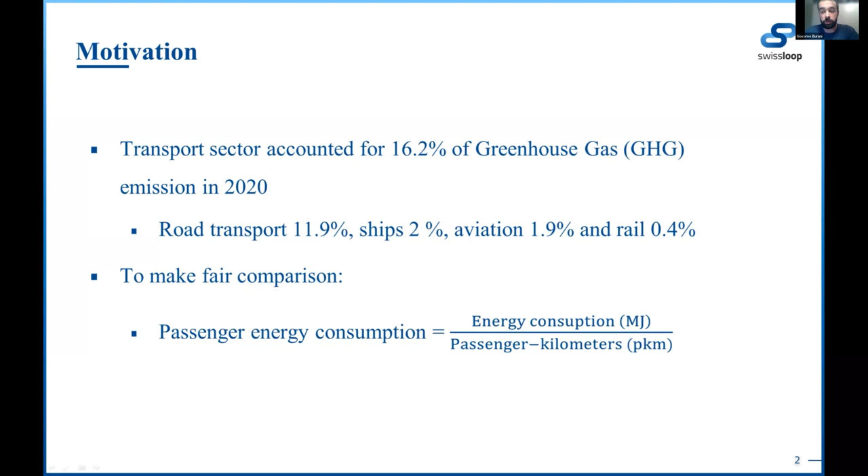In this table, this quantity, together with other parameters, is presented for various methods of transport. As you can see, train and buses have the lowest energy consumption at full capacity in the third column. But when this quantity is adjusted with the statistical occupancy, buses seem to be more energy efficient. However, they still present some problems such as speed limitation, low capacity, and traffic problems.

Another transport method visible on the table is the Hyperloop concept, which can be a valid alternative to this classic method of transportation, and even better.

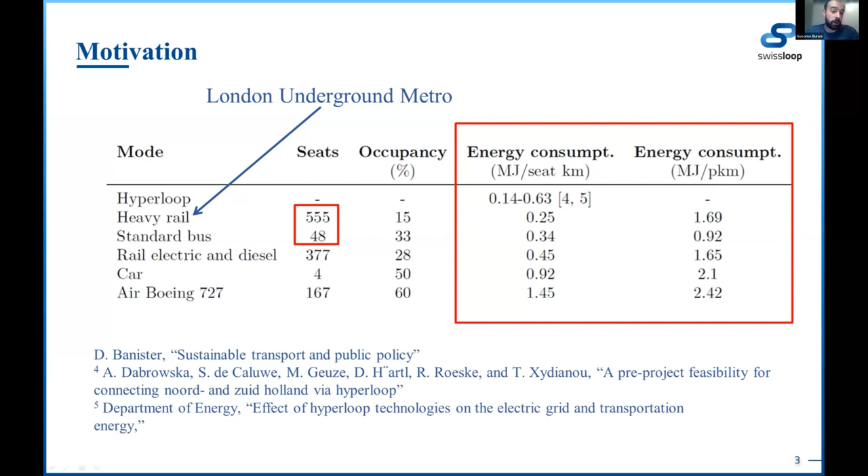This technology consists of magnetically levitated capsules traveling in vacuum tubes. It can reach a theoretical top speed of 1000 km per hour, comparable to that of planes and trains. It has a theoretical energy consumption comparable to that of trains and buses, as seen in the last table, and it is designed to not interfere with other capsules, solving the traffic problems. It's also quieter than both planes and trains, as the tubes can be placed underground or be soundproof.

It seems like this technology is combining the speed of planes and the energy efficiency of trains, and also bringing some additional advantages.

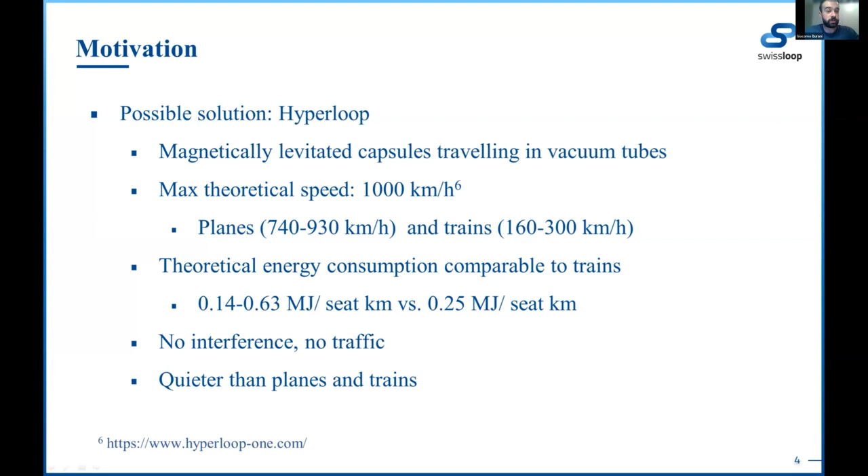Since this concept gained traction, a lot of university teams and companies were founded to develop this technology. One of them is the Swissloop team, founded at ETH in 2017, which I joined last season. This team builds a scaled-down prototype following the Hyperloop concept, the so-called pod. It innovates and improves it every year and tests it on a rail track.

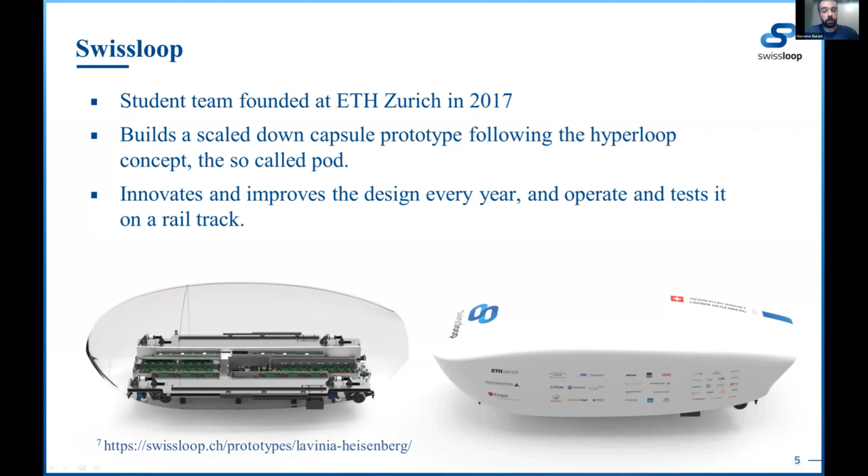Until last year, the pod consisted of a cart with wheels traveling on rail. One of the goals for last season was to remove the wheels, which are a source of friction and speed limitation, and provide a new guidance system to keep the pod centered on the track, because the new propulsion motor concept doesn't allow for passive stabilization anymore. My contribution to the team has therefore been to develop and simulate an actively controlled vertical levitation system and a magnetic guidance to solve these problems.

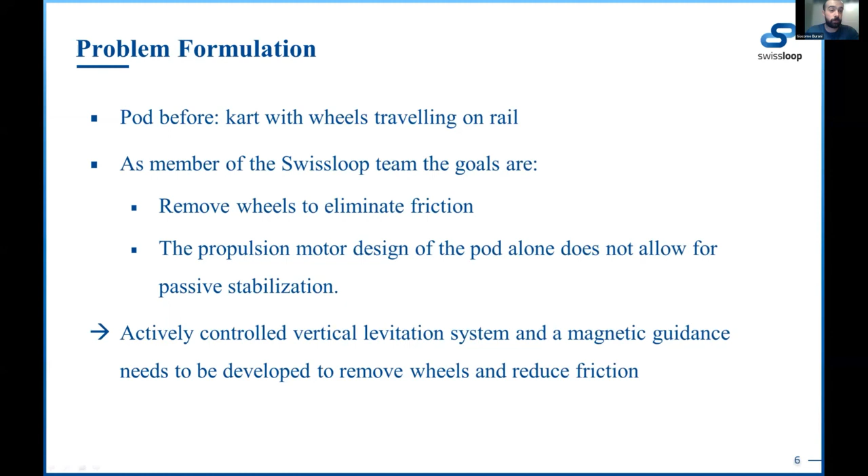Here you can see a 3D model of the pod on the left and a cross-section on the right that better presents the components part of this project. The guidance wheels are removed and substituted with safety wheels that work as a hard stop to prevent derailment and excessive displacement. The lateral guidance system consists of EMS, electromagnetic suspensions, and has to keep the pod centered with respect to the center line. This is important because the reluctance motor in the center introduces strong disturbance forces when it's not perfectly centered.

Finally, the vertical levitation is achieved using HEMS, hybrid electromagnetic suspension. This consists of electromagnets coupled with permanent magnets. The choice of using permanent magnets is made to compensate the constant weight of the pod and be more energy efficient.

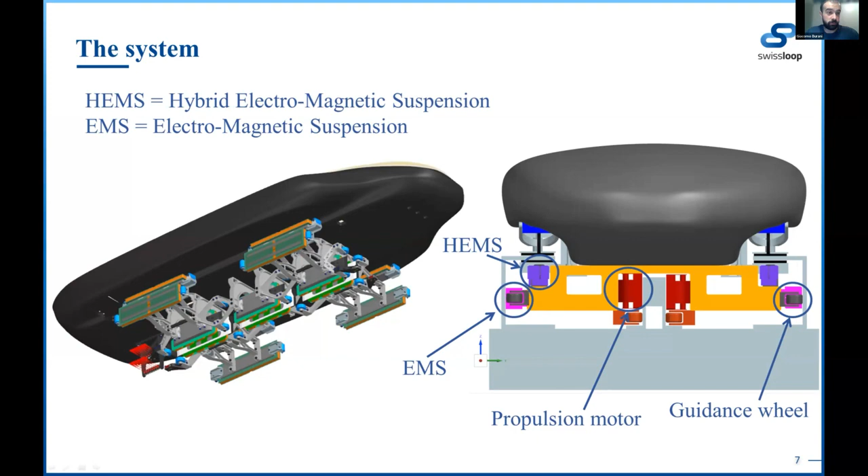Before introducing the dynamics of the system, I would like to introduce some key parameters that allow us to simplify the modeling and the simulations. The first one is the current rise time, which quantifies how fast the current is able to react and change. The dynamics time constant is similar, and it determines how fast the pod moves. It is calculated with a freefall approach, and it's the time it takes the pod to reach the maximal displacement allowed.

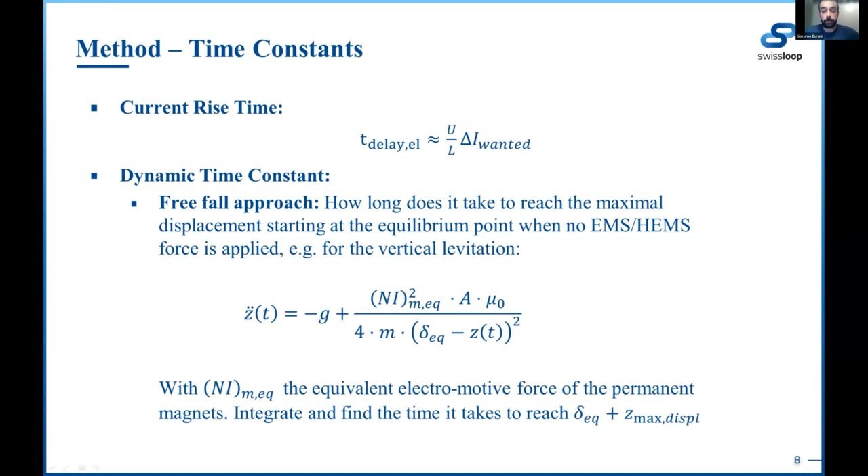Comparing these two quantities, as shown in this table, allows us to assume that the currents change much faster than the pod moves. It is therefore possible to control each electromagnet and hybrid electromagnet independently as a 1 degree of freedom system. This allows us to reduce the complexity of the dynamics and to avoid using a MIMO controller, for example.

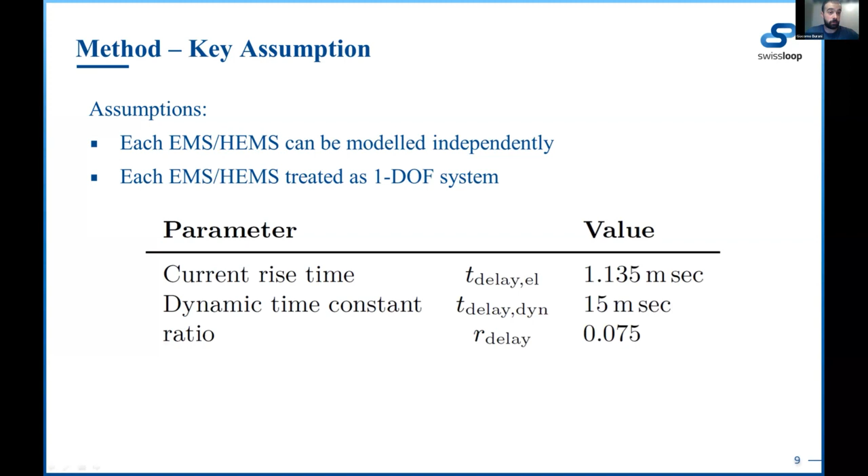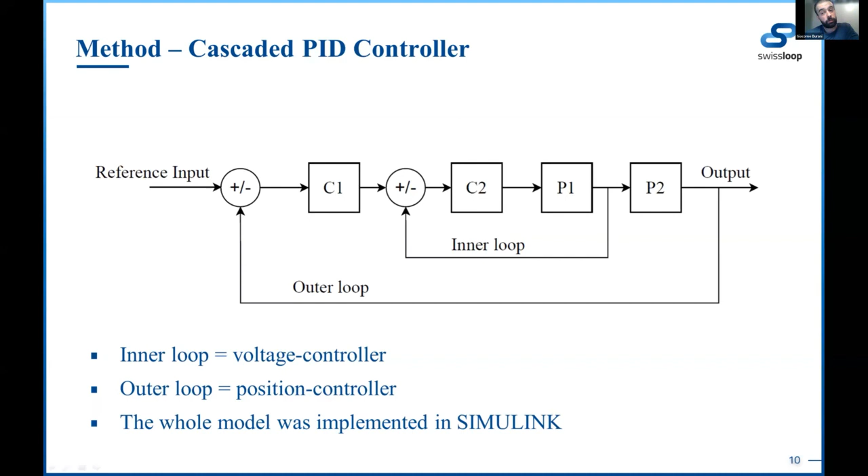This control loop is then simulated in Simulink. This control structure allows us to simplify the dynamics of the electromagnetic circuit. Being inside the inner loop, we can therefore assume that all the quantities related to the outer loop are constant, for example this change in the air gap that you can see here. This simplifies the dynamics a lot and allows us to calculate the transfer function from the voltage to the current. This is important because the inverter the team uses acts on the voltage and not on the current.

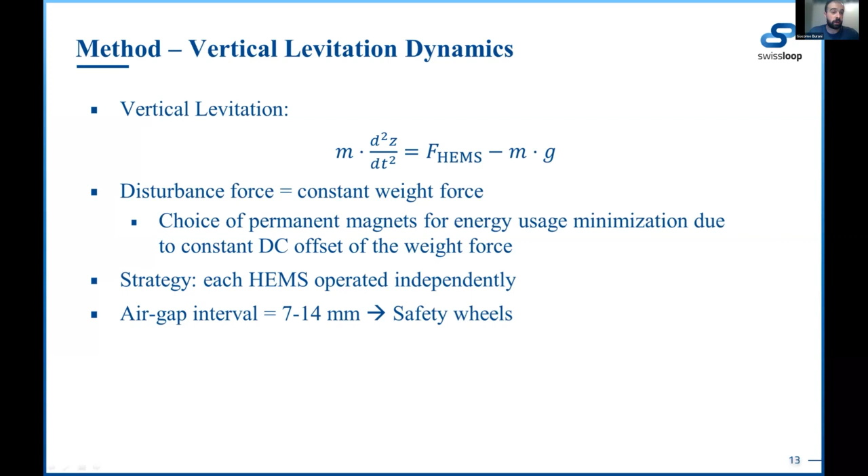Here you can see the equation I used to express the dynamics of the vertical levitation system. The strategy I used is to simulate each hybrid electromagnet independently. And as already mentioned, safety wheels are used to limit the displacement of the pod, which has to stay in the range of 7 to 14 millimeters with respect to the rail.

In the case of the lateral guidance system, disturbance force is not constant anymore, but is a function of the misalignment of the motor with respect to the center line. It is very strong, therefore, to be able to control the pod, the allowed displacement range is smaller.

Given that it's only possible to attract with electromagnets, I need one electromagnet on the right and one on the left, front and back, so a total of 4 electromagnets for the lateral guidance. The strategy is to divide the electromagnets in couples, front and back, and to operate only one of the electromagnets, left and right, depending on the direction of the disturbance force, which can be both positive and negative depending on the misalignment.

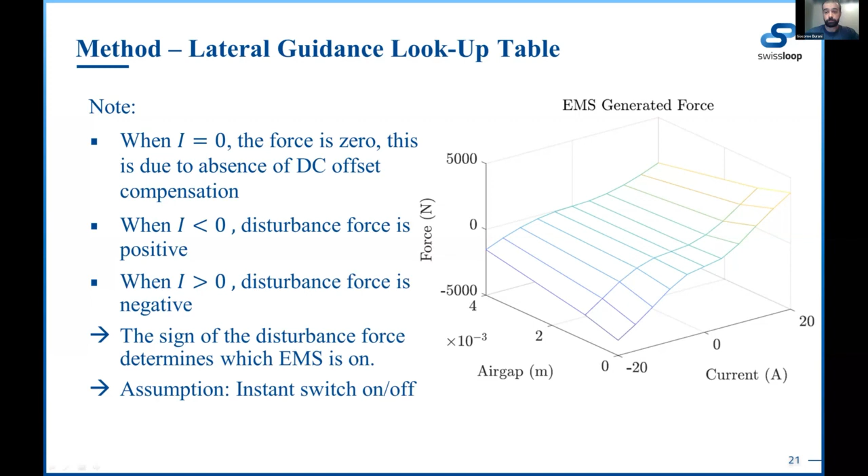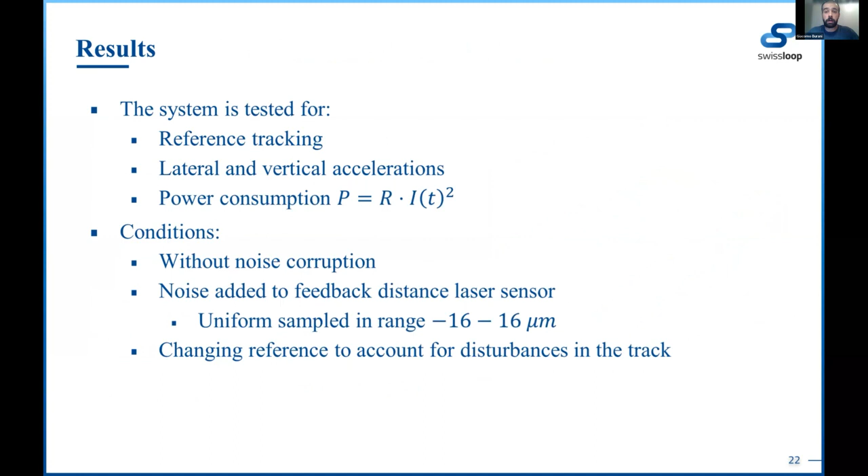The system was tested for reference tracking, lateral and vertical acceleration, and power consumption. To test the system, the reference was changed to simulate bumps and disturbances in the track, and noise was added to the feedback sensor. Here are some results for the lateral reference tracking. As you can see, the system is able to track the reference nicely and the safety wheels are never engaged. The total consumption of power was in this case estimated to be 124 watts.

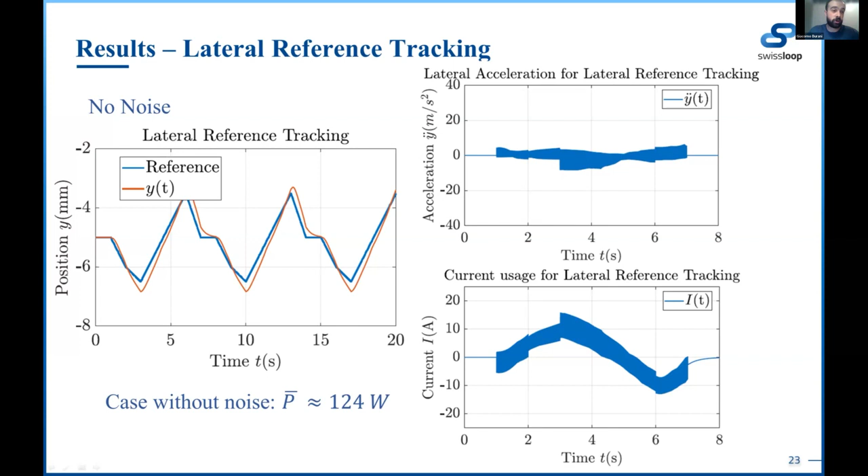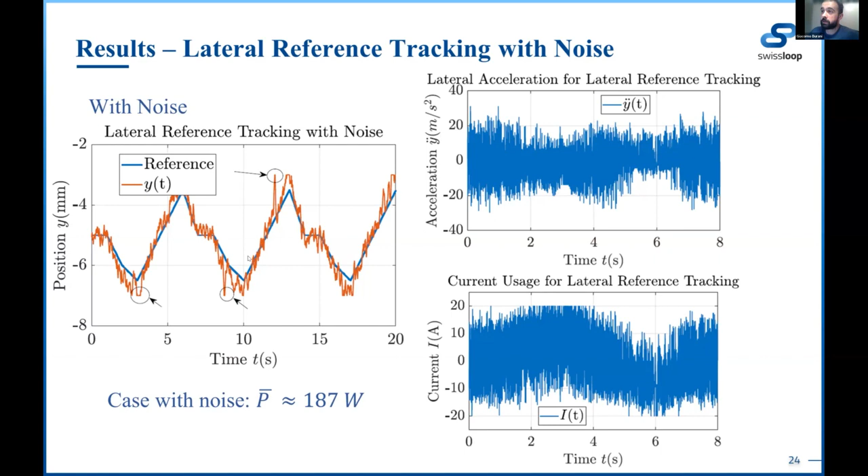In the case where noise was added to the feedback sensor, we can see that the guidance is still able to follow the reference, but safety wheels are minimally engaged in these cases. As expected, the power consumption increased to 187 watts to counteract the noise effects.

The results for the vertical levitation system are similar, but as the allowed levitation range is bigger and the disturbance force is smaller, the safety wheels are not engaged, even in the case of noise corruption. In conclusion, the system is able to efficiently track the reference, but in the case where noise is added to the system, the safety wheels need to be minimally engaged, as we see.

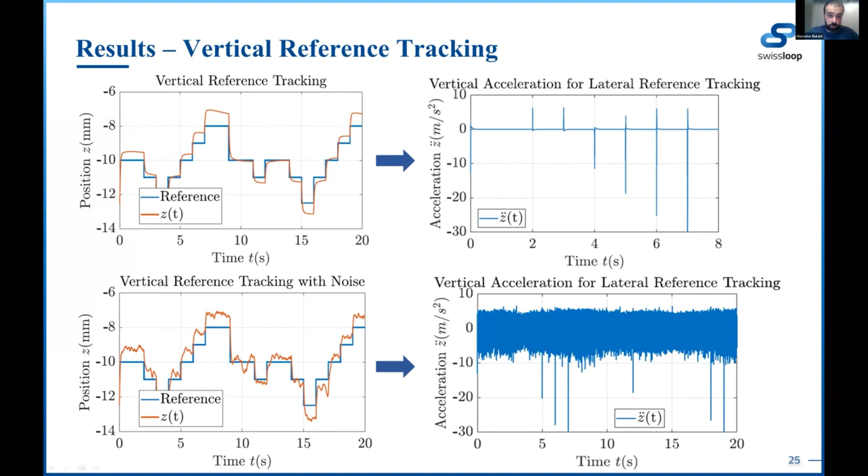Sometimes we noticed huge spikes in the accelerations, which you can, for example, see here. You can also get some spikes at minus 30 meters per second squared. But as these accelerations were instantaneous, there was no concern because they had negligible effect on the speed.

The noise increased the power consumption by 50% in the simulations, but this has to be further investigated in the physical system, because in this project the current was able to change really fast, which may not be the case in reality. As a bigger conclusion, I suggested increasing the operating range for the lateral guidance to avoid the need for safety wheel engagement.

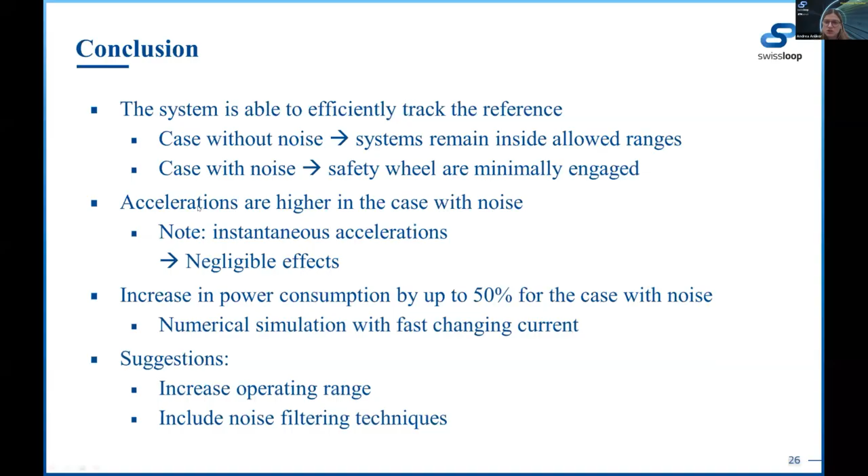Thank you, Giacomo. We do have a few questions in the Q&A, so we'll start with them. One question is about the HEMS, the vertical system. You mentioned the magnets are compensating for the weight of the pod. How accurate is this calculated, and can you still load different kinds of weights on the pod, or is it specific to one weight?

Last year the competition was without any payload, so the weight of the pod was pretty much known. We also added a safety factor, and we calculated it by summing the individual force of the permanent magnets to compensate for the weight of the pod.

So in the end it was an assumption from the mechanical designs and materials, which still have some margin. But you calculated it to lift more than the weight of the pod? Well, you still have the force coming from the electromagnets.

The baseline was to be able to levitate at the equilibrium position only with the permanent magnets, and then to handle disturbances and bumps in the track, or any other external disturbance, using the force from the electromagnets, not the permanent magnets. So in the end you don't need additional current or energy. Exactly, if everything went smoothly and the track was perfectly aligned, only the permanent magnets would suffice.

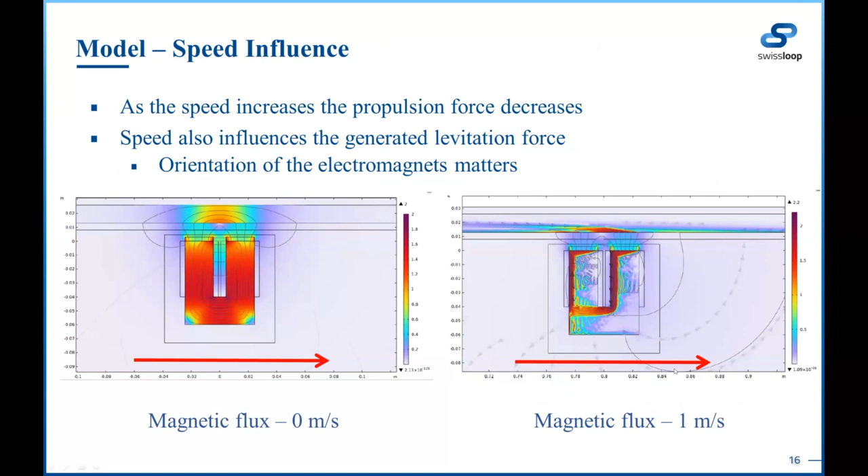Can you repeat? I'm just clarifying: is that the way HEMS controls the magnetic pull force? By running the current in the coil in the opposite direction of the field in the permanent magnet? Exactly. Basically, with a positive current it was defined that it strengthens the force coming from the electromagnets, while with a negative current, it weakens it.

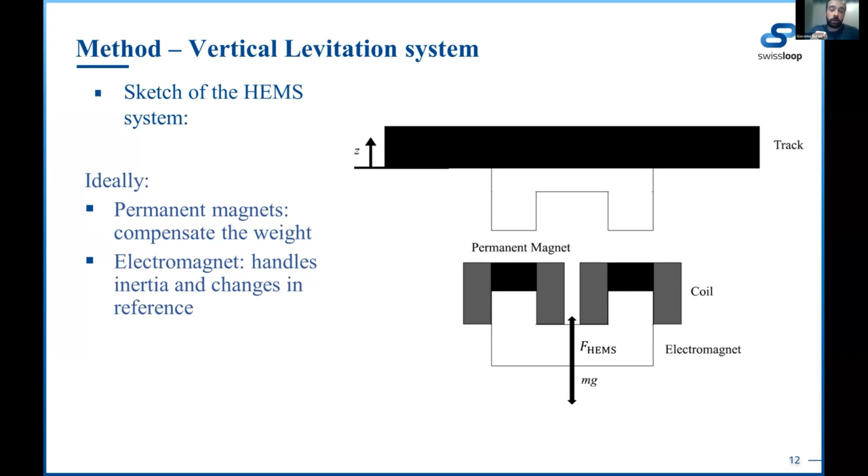I wasn't there anymore because I was doing my internship, but it worked smoothly, the levitation was working fine. Oh okay, so it seems like that's not really a concern.

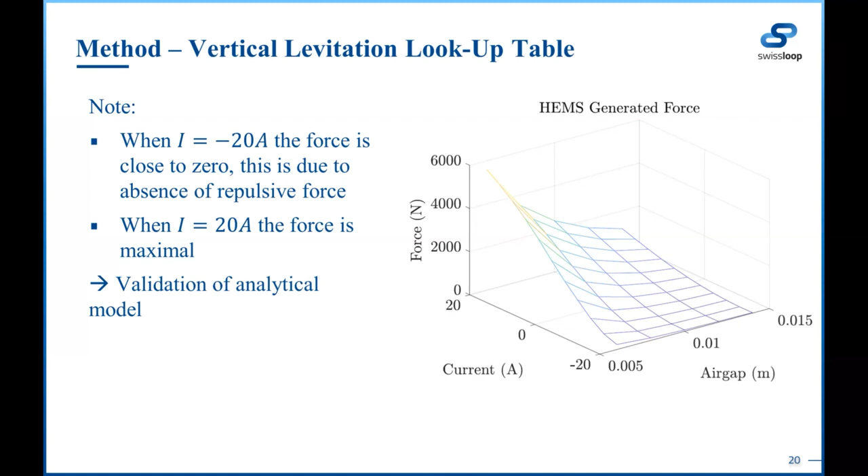Last question: how were you guys accounting for changes in inductance, or is it negligible and it lined up with your assumption? Changing in inductance, where? Oh, like the inductance of your HEMS, for example, would change as a function of the gap, right? Oh yeah, sure.

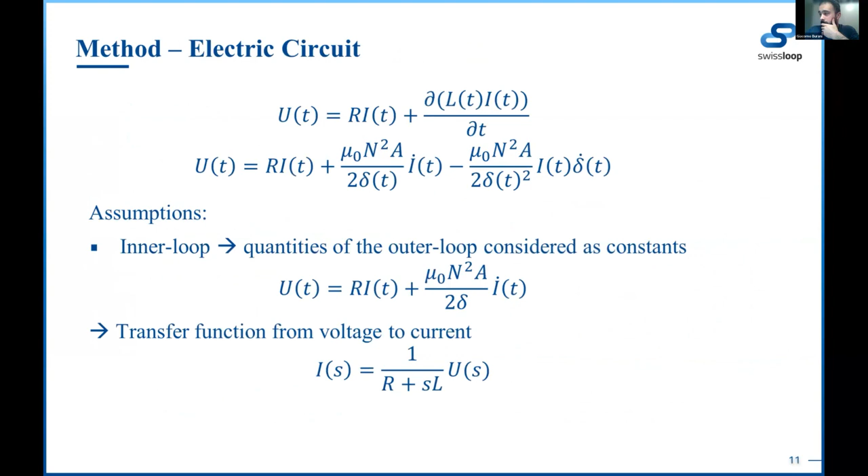It was all in the model. First here, you can see it's accounted for—maybe I have an equation somewhere. No, I don't have the equation with the inductance, but when you simplify it, you can get something like this, which already accounts for the air gap and the current flowing in the electromagnet.

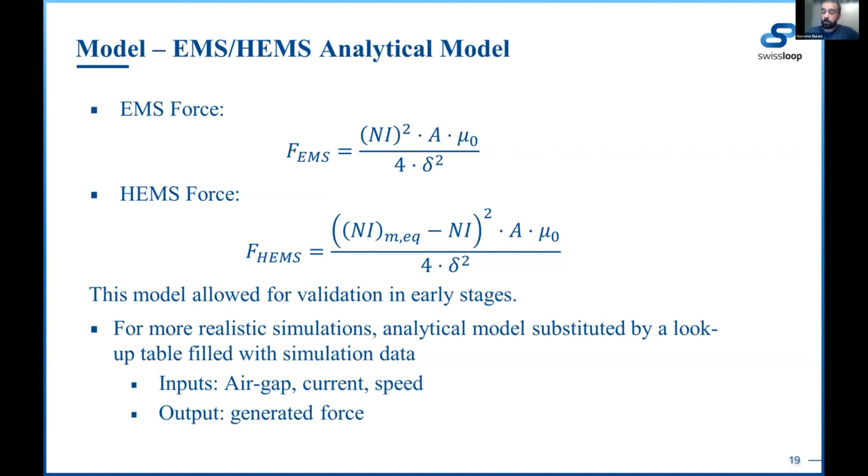Okay, thank you. So in terms of designing the vertical levitation system, you design it around the weight, right? I assume. Yep. So how do you design the operating point for lateral guidance? Just curious. The operating point for the lateral guidance, yes. So...

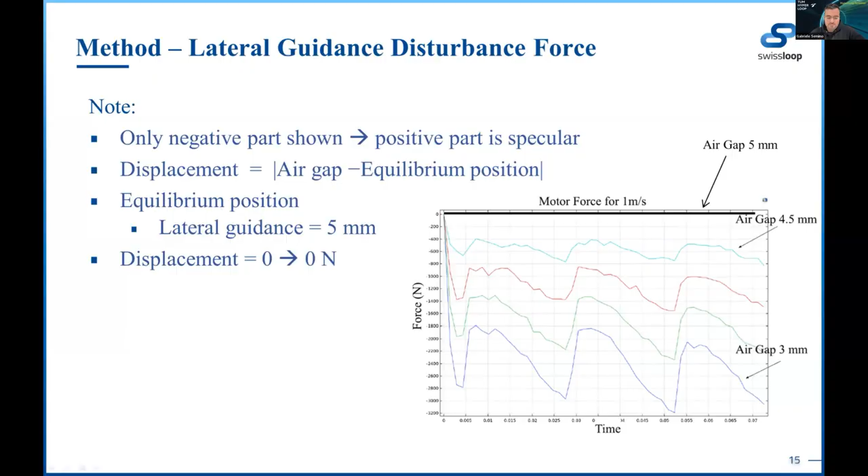Oliver has been in the TUM Hyperloop team for four years now, I think, for quite a long time since we started developing our full-scale Hyperloop demonstrator, which in principle is a 4-ton pod in passenger size. I think it will show an image anyway right now. His task has been from the beginning to work on the control for this magnetic levitation system, in principle quite similar to what we've just heard. He will go in particular into the use of equivalent magnet circuits for modeling the levitation system for the control. So I'll just hand over to Oliver for this.

Yes, hey everybody, nice to see you guys. Thank you, Gabi, for the introduction. I'm Oliver, and I work, as Gabi said, on the TUM Hyperloop and on the levitation modeling and control. So it actually fits very well to Giacomo's presentation.

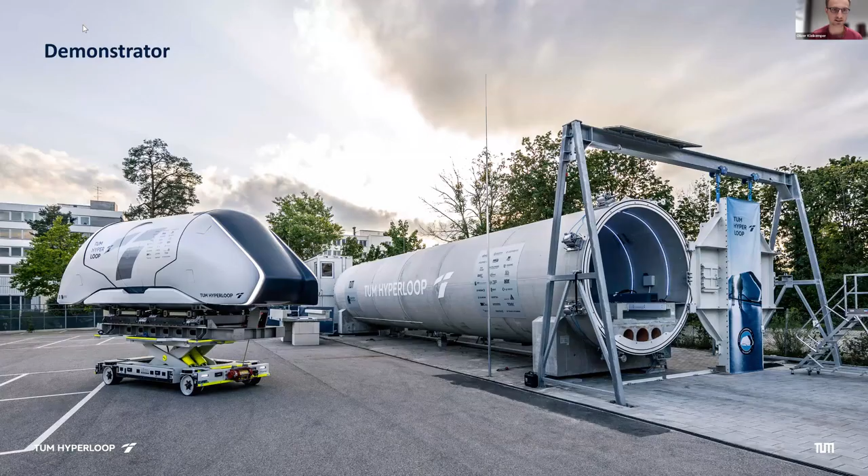Let's get started. On this slide you can see our current demonstrator setup. On the left side you can see the TUM Hyperloop pod. It consists of a passenger module, which you can see on the top, where the passengers can sit quite comfortably and the drive in our demonstrator. On the bottom, sitting right on this trailer we have, is the so-called service module. In this service module, all the electronics of our pod sit.

There's the propulsion hosted, and there are also the electromagnets for guidance and levitation. On the right side you can see the tube of our demonstrator, where we have two L-shaped guideway elements. On these Ls there are the reaction rails for levitation and guidance, where we pull ourselves up to. The tube is currently 24 meters long, and it's also possible to evacuate it and test the demonstrator in a real vacuum Hyperloop environment.

I will now talk in more detail about the magnet system, and especially how it's important to model it correctly and in quite a detail to have a useful tool for simulations, for vehicle simulations, and also for model-based control algorithms. The general goals of every model are, I think, to have a model that is intuitive and probably adaptive for different scenarios or different geometries.

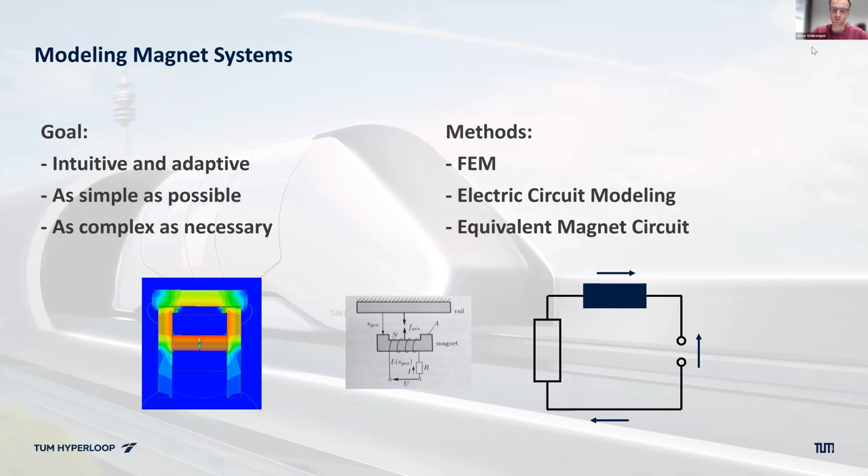Another method is an electric circuit model. I think this is kind of the thing we just saw in the previous presentation. Another approach I want to focus on today is the so-called equivalent magnet circuit. As you probably know, magnetic circuits can also be replaced or described using an electric circuit. This presentation will be about that.

Let's have a quick roundup about the influences of the static and dynamic behavior of a levitation system, or also guidance system - it doesn't really matter at this point. The main influence is obviously the air gap between the reaction rail and the pole surface of your electromagnet. When you consider these equivalent magnet circuits or finite element models, it's always important to analyze your flux lines and also consider their length and diffusion or possible leakage flux paths. So these are the geometry influences.

Then we also have material influences, especially the permeability of iron and the variation due to saturation. As we all know, we try to make the pods as light as possible. It's a common choice to operate a levitation system in an area where the saturation effects of the iron already come into play. So it's another conflict of interest - to have it lightweight, but also to avoid going too far into saturation. But it's definitely a thing you have to consider in the model.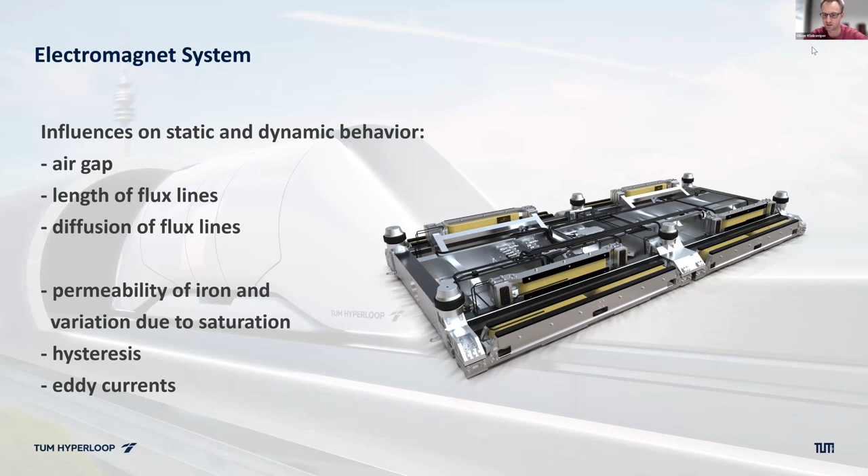Let's have a quick look at the equivalence of the electric circuit to the magnetic circuit. So we also have a potential quantity - the voltage is replaced by the magnetic supply voltage, also called magnetomotive force. Instead of a current flowing through an electric circuit, we now consider the magnetic fluxes going through the magnetic circuit. We can model resistances similar to the electric circuit by magnetic reluctances, and we can also model inductive behavior by magnetic inductances that can be used to describe eddy current influences.

In analogy to Ohm's law, we can formulate Hopkinson's law as a foundation for the magnetic circuit - the magnetic supply voltage equals the magnetic reluctances times the fluxes going through the elements. For a single or simple solenoid, we can also formulate Ampere's law: the magnetic supply voltage coming from the solenoid will be the winding number times the current. And for building up these magnetic circuits, you can also use Kirchhoff's law like you are used to in electrical circuits.

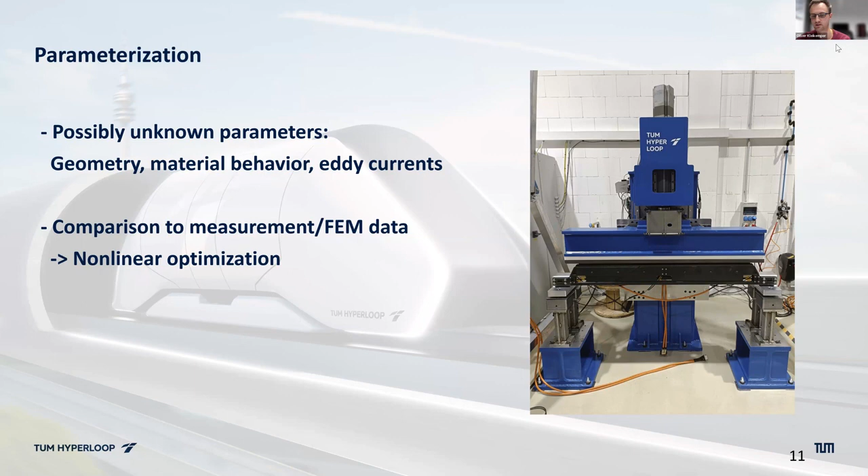And for this, we use nonlinear optimization tools that are able to find a good solution for that. Okay, let's have a quick look at our results.

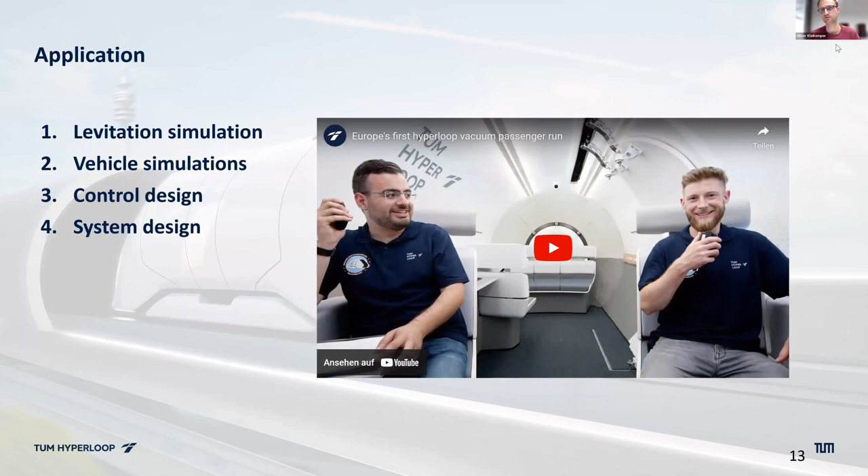So what are the applications of our equivalent magnetic circuit? At first, you have a very powerful and easy levitation simulation tool where you can simulate your different control algorithms. Then you have a big advantage because you modeled one single part of your whole pod very well and accurately. It's easy to implement this well-made model into bigger vehicle simulations where you have several electromagnets, also for levitation and guidance. You can use it for both.

Another big plus is, of course, you can derive model-based control algorithms on this because you have mathematical equations that describe your model, which is a very nice tool. Another interesting aspect is that you're also able to long-term design your system, similar to FEM, you can gain knowledge. What happens if I change this geometry? What happens if I use that and that material? You can tweak your system and see what happens before you design it.

As a quick motivation, I brought this video which shows our first Hyperloop test in vacuum. You can also see it on YouTube. At some point, our levitation system is also at work. I just want to show it as motivation since the equivalent magnetic circuit is also one part of this happening.

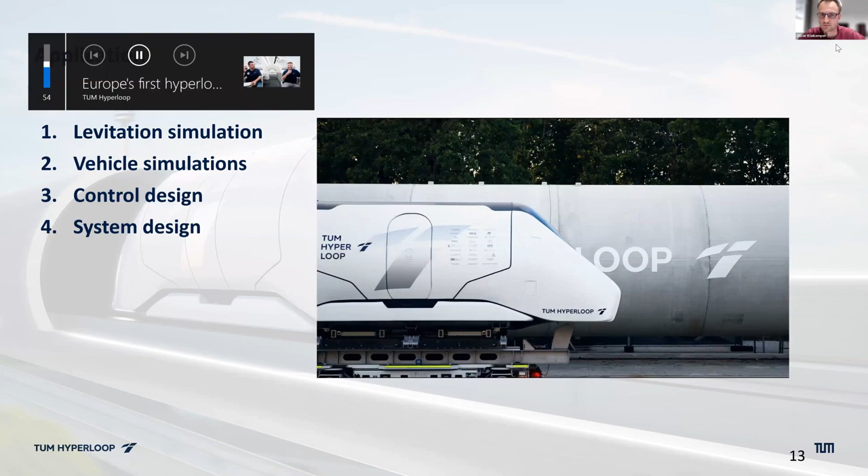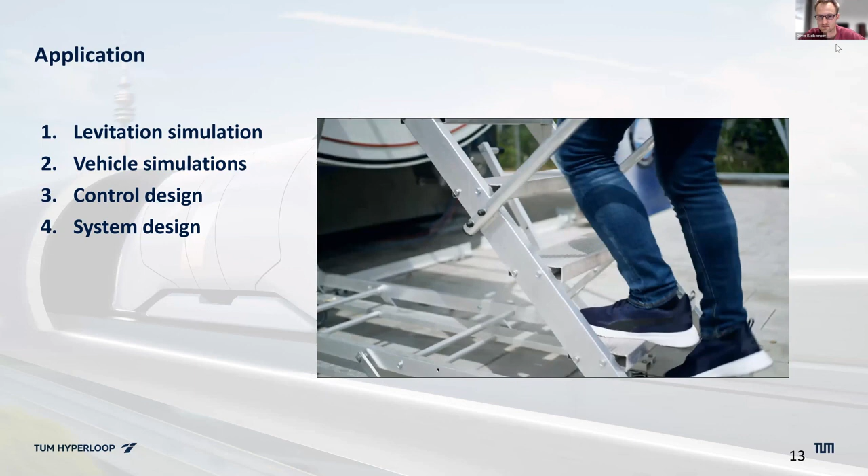Yeah, this is our pod interior. Maybe you've seen it somewhere on social media.

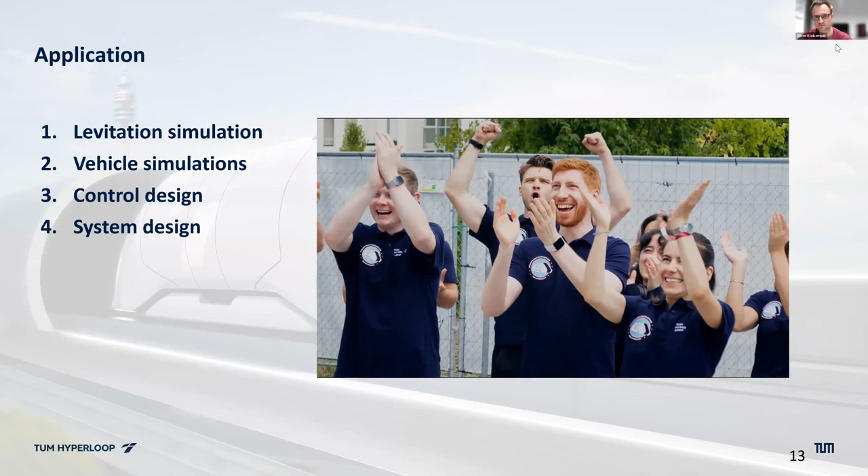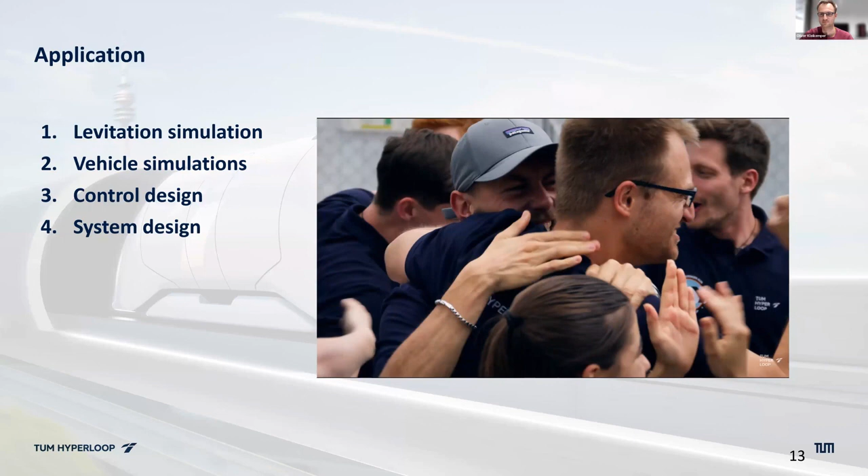Thank you very much, Olli, for the presentation. We have one question from the Q&A function, so the question is about the leakage flux. In particular, what would happen if you don't account for it, and why is there a leakage flux at all?

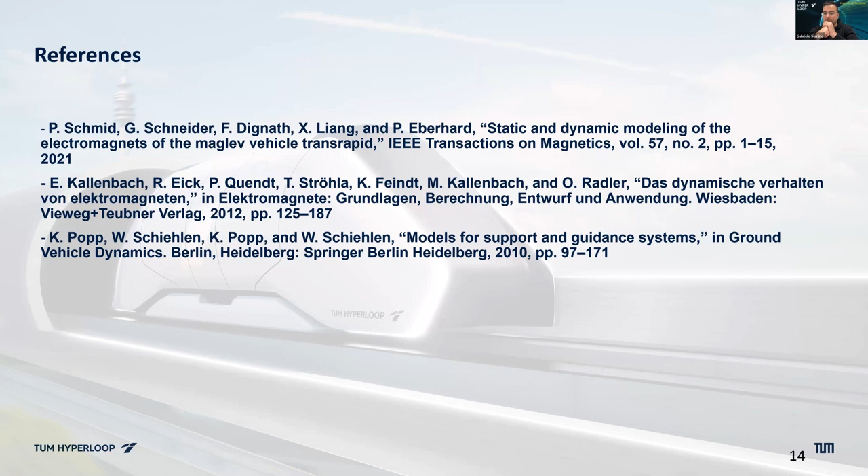You can also model it without, then you just have fewer states. It's also possible, but I think it's closer to reality if you also try to somehow compensate this influence. But of course, it's also possible to start with only the acting flux and see where you get there.

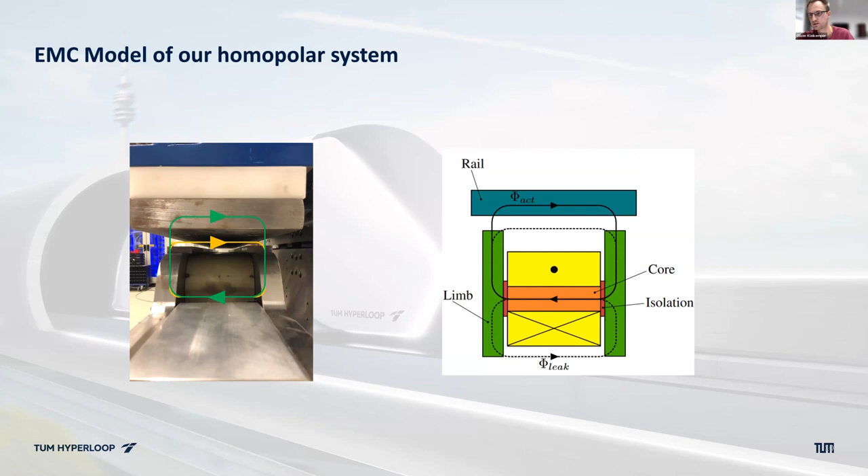Okay, then we have two raised hands from Giacomo. Yeah, thank you for the presentation. This is actually really cool stuff.

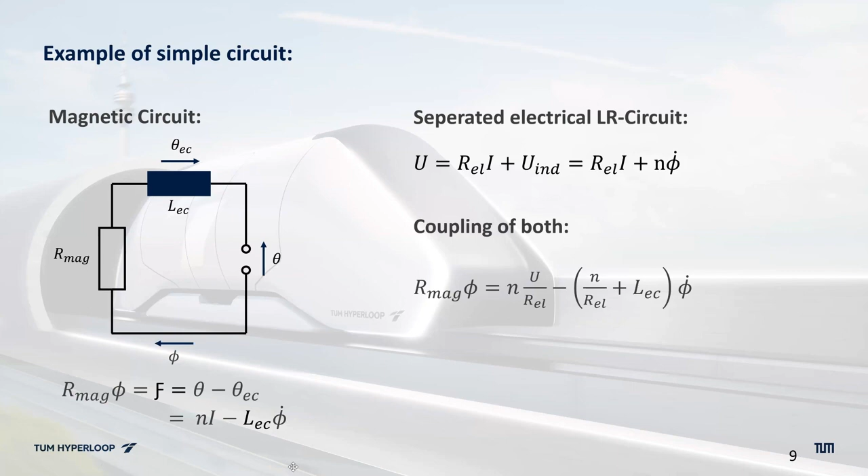So where do you see the model kind of falling short? I can see that the reluctance isn't really the same as resistance in the sense that it's not dissipating power, right? The same way resistance would dissipate in electrical. So where else do you see the model falling short?

I mean, you can always try to make things more complicated. So you could at some point maybe add something like what Giacomo did, that you have also have a distributed parameter system, so when you go over unmagnetized rail and see what happens then. Also, we didn't include thermal stuff yet, so heating up of the coils.

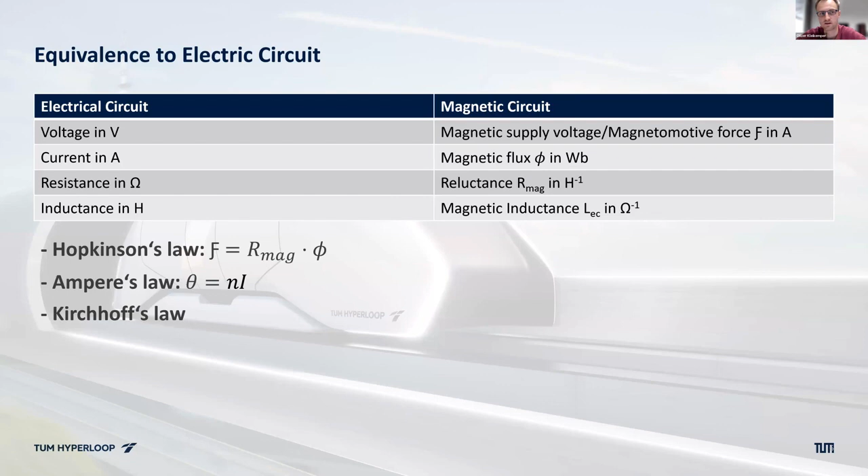But in general, it sometimes is very complicated, or not as intuitive as it seems, because you have these saturation curves. For example, if you use this ansatz, and they will go into every of your magnetic reluctances, and then you will end up having very huge nonlinear equations that are not that intuitive. So this can be a drawback compared to other systems, but of course, on the other hand, you don't have to look in these equations all the time. You just let Simulink do it and solve it, and just look at the output and see if that makes sense.

Yeah, gotcha. That was basically my follow-up question. But do you have any more comments about using equivalent magnetic circuit and FEM hand in hand? Is the circuit kind of a way to help you design, give you the groundwork for the intuition behind designing things like this, and then FEM gives you the actual numbers? Is that how that pipeline works?

Yeah, I guess that can work. And also, I'm not sure if FEM is capable of giving you... I mean, it solves all the same equations we also formulate here, but you don't have a mathematical representation of your outcome. So I think that's an advantage of this modeling technique, that you actually have a function of the magnetic force based on current and air gap, or of your inductance. And I'm not sure, maybe it's also possible with FEM, but I don't know for sure.